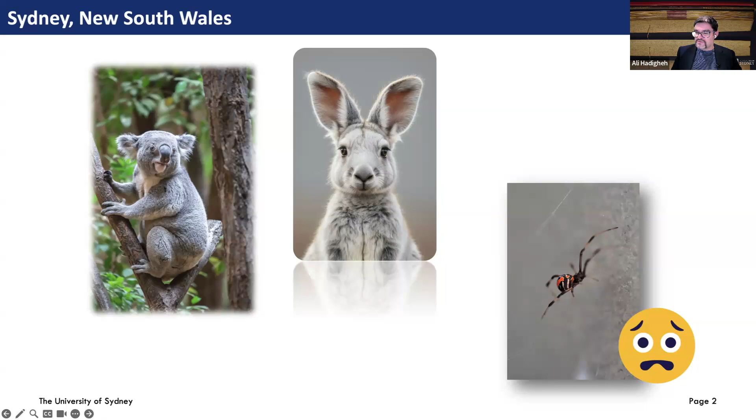I'll just start with some basics about where we're coming from. Probably some of you know Sydney, that's part of Australia, in the state of New South Wales. We're in the eastern part of Australia, and you might be familiar with structures like the Sydney Opera House and Harbour Bridge. We have very cute animals, kangaroos, koalas, friendly faces, but also some very scary ones, the deadliest spiders in the world. So different types of animals and friends we have here.

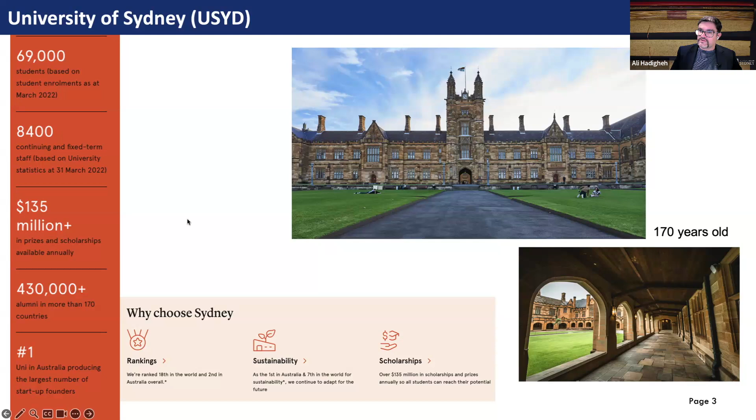In terms of introduction to our university, University of Sydney is the first university in Australia, established around 1850, so roughly 150 to 170 years old. We have diverse international students, and we offer different PhD degrees, undergraduate degrees, and so on.

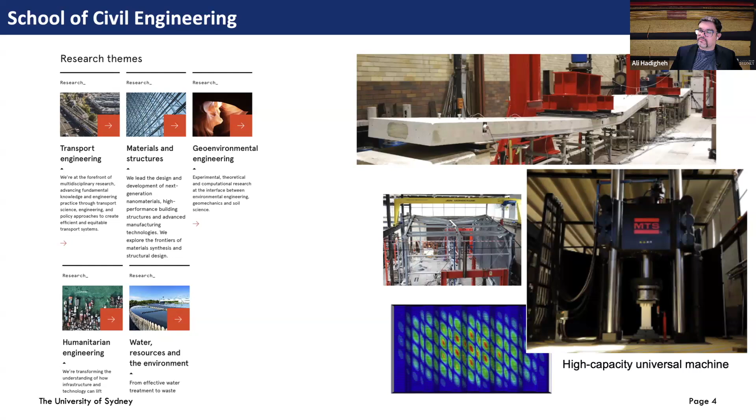The School of Civil Engineering is one of the oldest schools in University of Sydney, and we have different research teams and groups focusing on materials, transport, structural engineering, humanitarian work, water, and so on. Similar to other universities, we have state-of-the-art facilities for material testing, characterization, and structural testing.

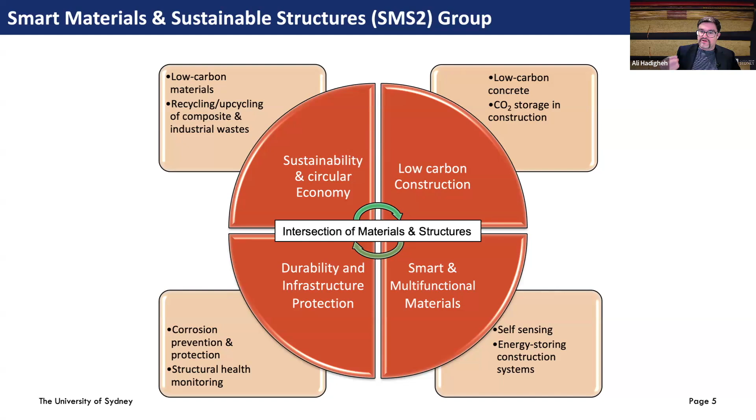To give you a better understanding of my research area, it's basically at the intersection of materials and structures. I focus a lot on the material side, but the application is in structural applications. Majority of my research relates to sustainability and circular economy, specifically composite waste, low carbon concrete, low carbon construction, and cementitious materials, looking at self-sensing in cementitious materials, and structural health monitoring using those self-sensing techniques, and how we can prevent corrosion and improve the durability of structures. Most of this focus area is basically carbon fiber and carbonaceous materials.

All of this has been achievable through the dedication of my research students, PhD students, postdocs, and so on, and also contributions from our industry partners from different areas, departments, and companies.

But to get into the topic of today, I mainly want to focus on the closed loop life cycle of FRP composites. I think everyone here is familiar with what FRP is, fiber reinforced polymer composites, and most likely everyone knows the advantages and benefits of these FRP composites. They are lightweight, with superior mechanical properties and durability properties, and at the same time lightweight, so they are perfect for lots of high-end applications.

This leads to, when we're talking about high quality, high mechanical properties, but at the same time high durability and lower weight, it's very fascinating and interesting to industry to use it, specifically for high-end products and reducing CO2 emissions from their components, for example in the car industry or aerospace. So we are always looking for smaller, lighter materials.

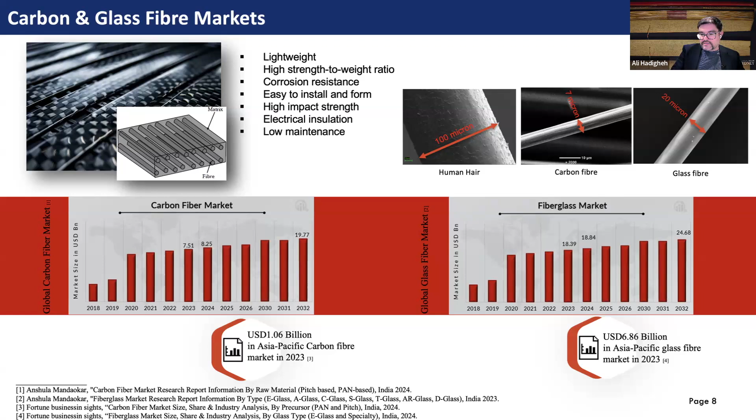The growth of these fibers—in this research and this webinar I mainly focus on two major fibers, carbon fibers and glass fibers—we see the trend always going up, increasing. Lots of industries are adopting these materials, from traditional industries to new industries, like for example hydrogen tanks and so on.

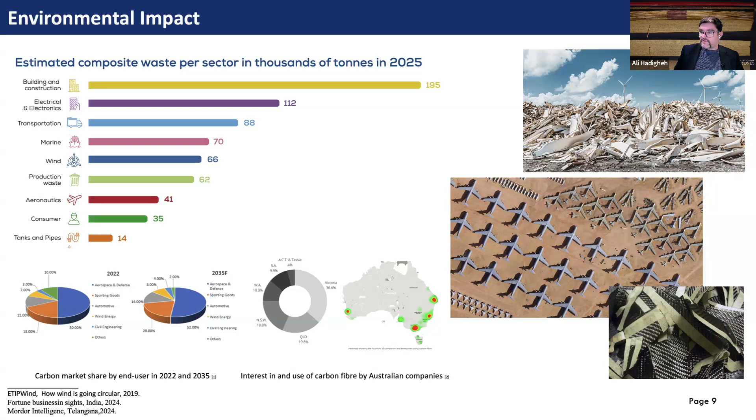The high usage of these composites leads to high wastage. The wastage we see is not just end-of-life components, it's also the waste materials we see during manufacturing. Traditionally, around 30% of those fibers and composites are wasted during manufacturing of the product, which is a huge amount. And when we look at the energy consumption for production of, for example, carbon fiber, and multiply it by the amount of waste, you see how much energy we're using but throwing away.

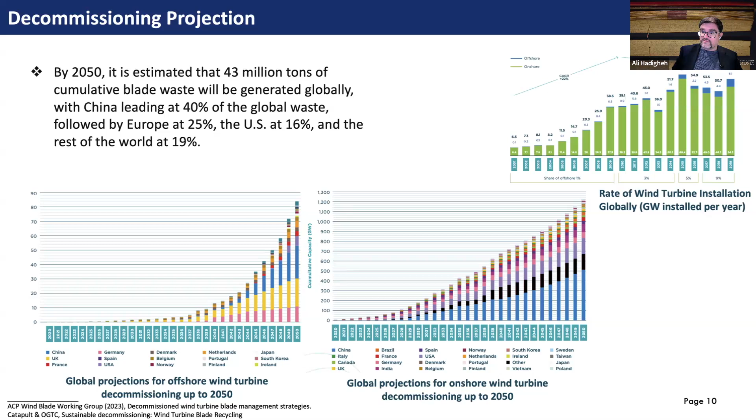So looking at one major sector, for example renewable energy, which is one of the largest users of FRP composites—I love the turbine blade behind Jose, there was a turbine very nicely made. We see the trend toward using and changing attitudes toward renewable energy in different parts of the globe has led to increased usage and production of turbine blades and their installation. We see this trend continuing up to 2050.

That leads to waste material at the end. So if you look at, for example, a turbine blade, and cut it into different sections, one of the main components is the foundation.

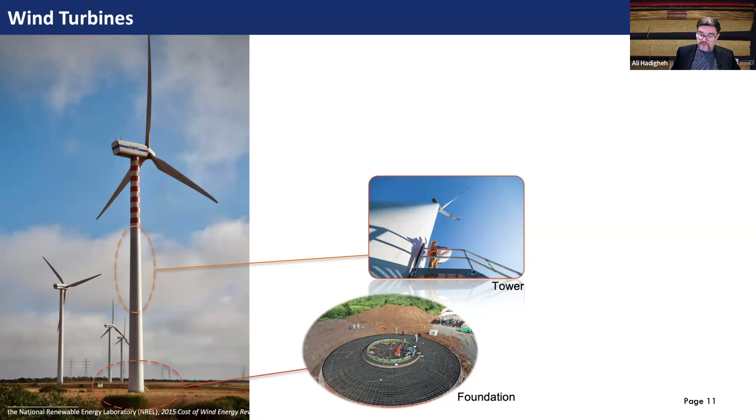Reinforced concrete, nothing extraordinary, we are all familiar with that. We know how to recycle them, we know how to reuse them. The other part is the shaft, the tower, which is mostly made of steel, some aluminum and other materials, and most of them are recyclable. So if we look at these components, there is no issue.

But if you look at that major component, which is the blade, you see that blade is made of different types of materials. One of them is fiber, is composite. So you have a combination of different polymeric materials, steel, balsa wood, aluminum and so on, to produce a blade in a turbine.

If we look at those turbine blades, the size dictates what sort of materials we have to use. Is it carbon? Is it glass? Is it a combination of them? Is it a hybrid system or not? So 40 to 50% of this blade is made of that composite.

And recycling of this is extremely difficult, and we know why, most of us know why that is difficult. When you cure the composite, separating that fiber from the epoxy is extremely difficult and energy intensive. So what can we do for that? How can we resolve this issue?

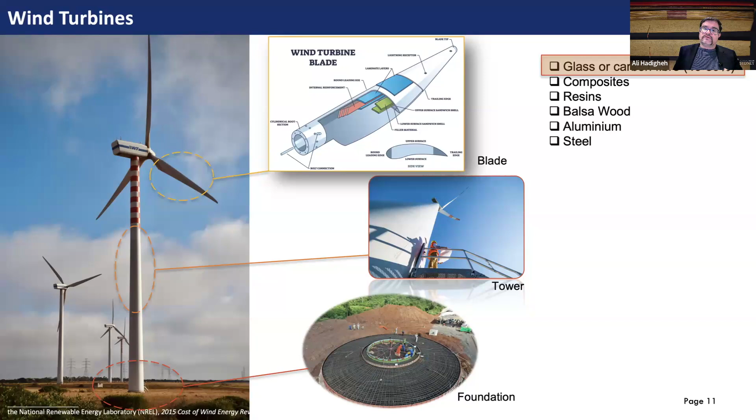First of all, if you look at the waste treatment hierarchy, we see that the top performing treatment methods are first prevention, preventing a structure from failing and keep reusing the material or a structure in the current system, and then repurposing that. These are the greenest ways of dealing with structures and materials.

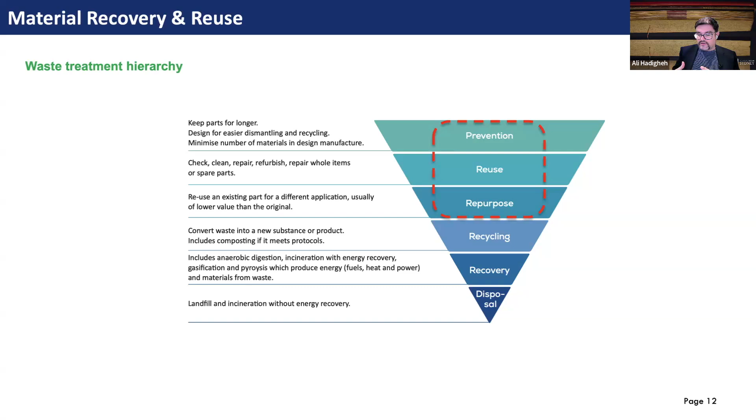And then when we don't have other options, then we look at recycling. So recycling is not the first option. That's what I'm trying to emphasize in most of my talks. My research and my work is related to recycling, but as I mentioned, it shouldn't be the first priority.

You might be familiar with these techniques, existing recycling pathways. We have techniques like co-processing, mechanical grinding, pyrolysis, solvolysis, electrical recycling, gasification, and other techniques.

And most of the top ones, if we look at, for example, pyrolysis, the technology readiness level is quite high, so they are already applied within industry, and we see recycled materials coming from pyrolysis plants. Mechanical recycling is also very advanced - basically grinding them and recycling and repurposing them. And co-processing during the cement kiln within the cement kiln reactor, and other techniques like solvolysis, which is a kind of chemical recycling method.

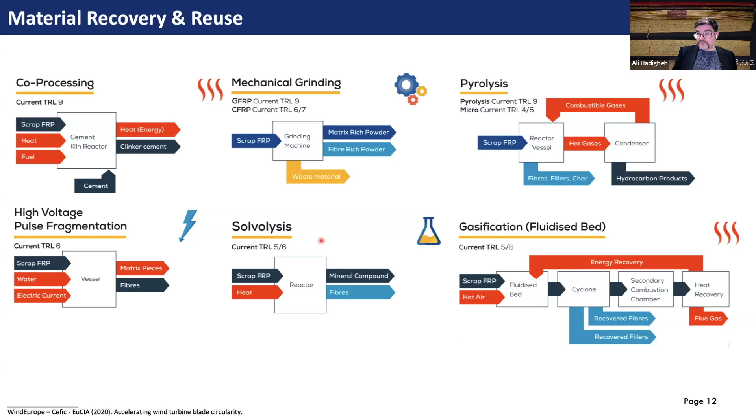But if we look at all these recycling methods, the biggest challenge is that when we have virgin composites, you're basically dealing with very well aligned fibers, nicely continuous and in perfect condition. But when we do recycling, you deal with a different scenario - you have short fibers, randomly distributed or mostly entangled fibers. So how do you deal with that?

And if we look at the performance of these aligned fibers versus randomly distributed short fibers, you see the performance of those randomly distributed ones is very minimal compared to virgin aligned fibers. So there are a lot of challenges in this space.

One of them is that alignment, the short nature of these recycled fibers. The other issue we might see within industry and in practical application is transportation. For example, when you deal with recycling of turbine blades, they are 20-meter, 50-meter, 100-meter blades. So how do we transport these? So logistics, WHS, how we can cut them, crush them safely to make sure harmful materials don't get into our lungs, and so on.

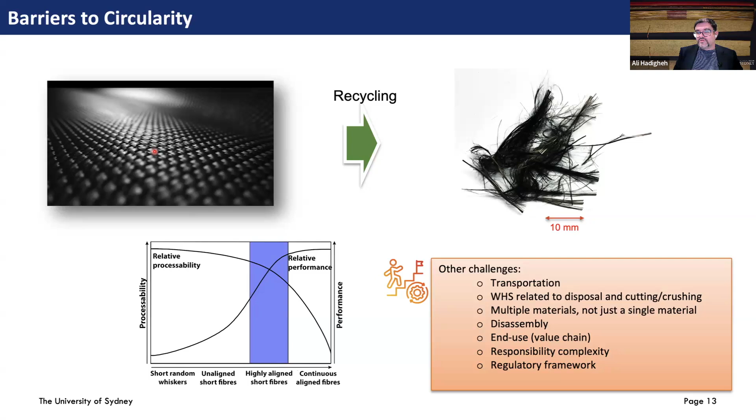Or if you want to repurpose those turbine blades to use in other types of structures, who will certify those? So all of these challenges exist, but they create multidisciplinary opportunities for us to do research, which I see a lot of people here doing - very fascinating, very interesting work in this space.

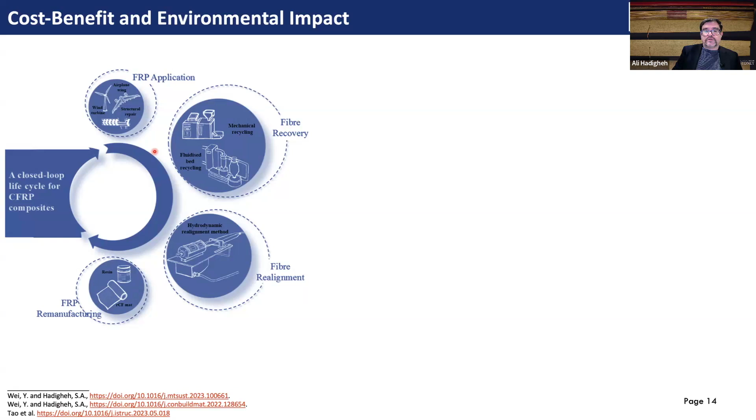I now look at some of the works that we did in the past. We basically started this type of research in 2019. We knew there were existing methods, and we wanted to see which one would be suitable and how we could proceed, and which one we had to select.

So we started with cost benefit and life cycle analysis, which helped us select methods suitable for the type of waste we were dealing with. We looked at both CFRP and GFRP, carbon FRP and glass FRP, because the scenario is different - the recycling method would be different for carbon and glass composite. Glass composite, GFRP, is quite cheap, so you can't use energy intensive or very expensive methods for recycling glass fiber from GFRP.

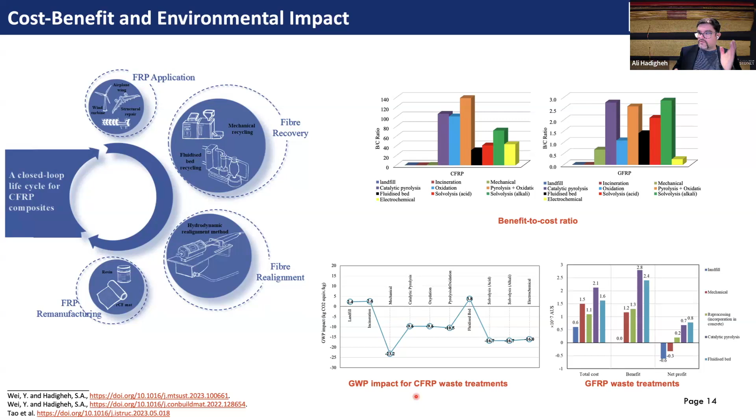But for CFRP, it makes sense because it's a strategic material, it's expensive, and production of virgin carbon fiber is very energy intensive. So it makes sense to use pyrolysis or solvolysis for extracting carbon fiber from FRP. We looked at cost to benefit ratio, and global warming potential of different methods, including landfill, incineration, mechanical, catalytic pyrolysis, solvolysis, and so on. Amongst these, for our FRP composites, we started with pyrolysis and oxidation method.

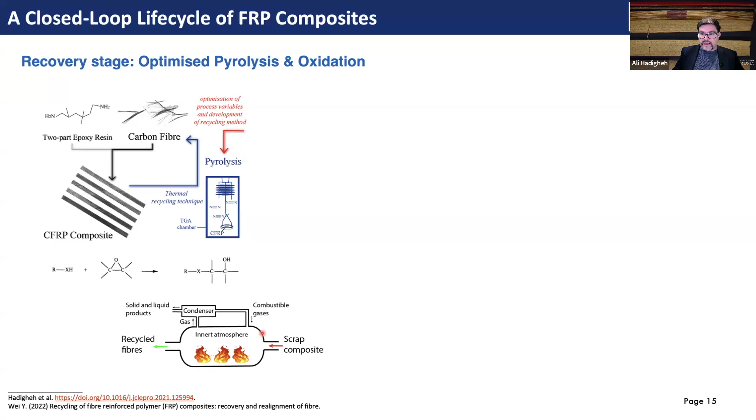If you're not familiar with those methods, pyrolysis is basically pyrolyzing or burning your samples within an inert atmosphere - in this case nitrogen - and then extracting fiber and separating it from epoxy within that system, then reusing those epoxies as combustible gases or byproducts.

After the process, with these CFRP composites, after recycling we could get clean carbon fiber from the composites of very good, high quality - around 80% tensile strength retention and 88% tensile modulus retention, which is quite reasonable, with minimum energy usage. But the challenge was that if you look in more detail, you see some discontinuity on the surface of the carbon fiber.

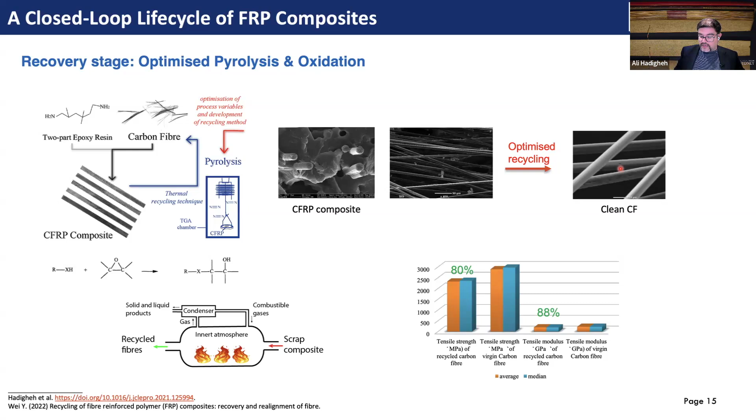This discontinuity relates mainly to the temperature we use. We tried to optimize that, but after a certain temperature, carbon fiber gets damaged. So we took that further. We worked with two different industries - one active in aerospace producing airplane components, and another active in maintaining high-end sports cars and carbon bikes.

So we got materials from them, and we were one of the first teams to look at hybridizing the system - solvolysis process and pyrolysis process. Basically, we use solvolysis as a pre-treatment method for separating fiber from epoxy, and then go through the pyrolysis.

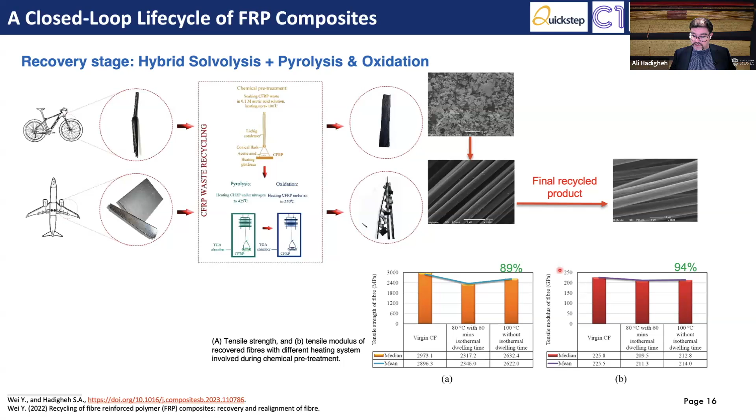What it does is basically reduce the energy demand, reduce the amount of heat we have to expose our fibers to. By that process, we could get very good, high quality carbon fiber at the end, shown in the tensile test we did in terms of tensile strength and tensile modulus, which was around 94% tensile modulus retention. So it was very good performance.

But now, more recently, we are looking at other options, which I think we're the only research group focusing on - microbial hydrolysis. This is effectively applied to cheap materials like GFRP composites. It's very suitable for that.

Basically, we work with four different fungi and do the microbial hydrolysis process - we culture those spores and fungi and expose the composite to them, and they basically try to use the epoxy as feedstock, then we extract the fiber. We're looking at how we can improve the enzymatic performance and activities within those spore solutions.

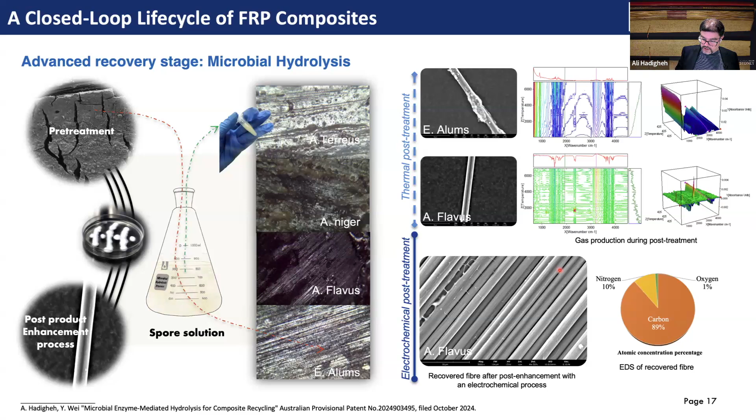So this is ongoing research. We have a patent for that, and we're hoping to get it into publication very soon. But still this issue exists - we're still dealing with randomly distributed, short fibers. How do we do that?

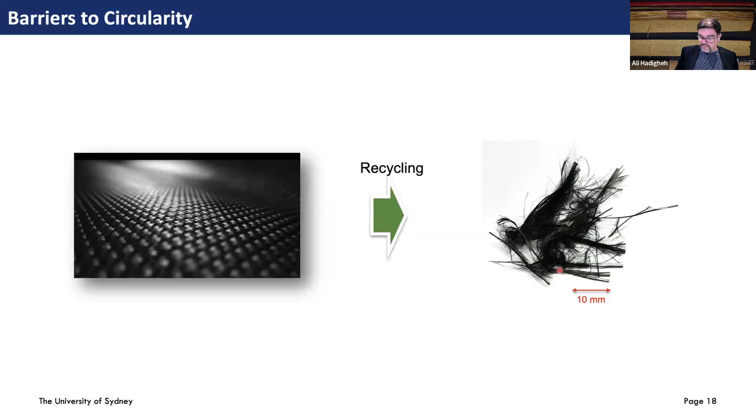We also looked at that with one of my PhD students - a previous PhD student - who looked at different methods you might know for aligning the fibers. She looked at the systematic analysis of these realignment methods and how effective they are and how they can help us.

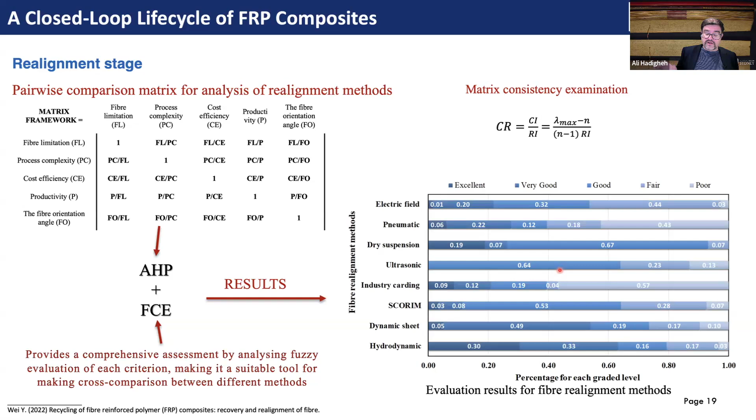We then came up with our own technique to basically align these randomly distributed fibers into the direction we desire. So we developed the hydrodynamic alignment method, the HFAM method, and we could get up to around 80%, 75% fiber alignment with our technique.

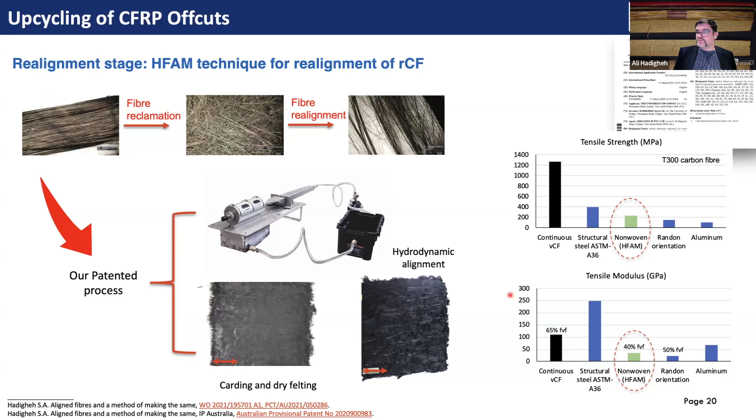We have a patent, a PCT patent on this technique, and we are working on applying these into different structures and different research areas.

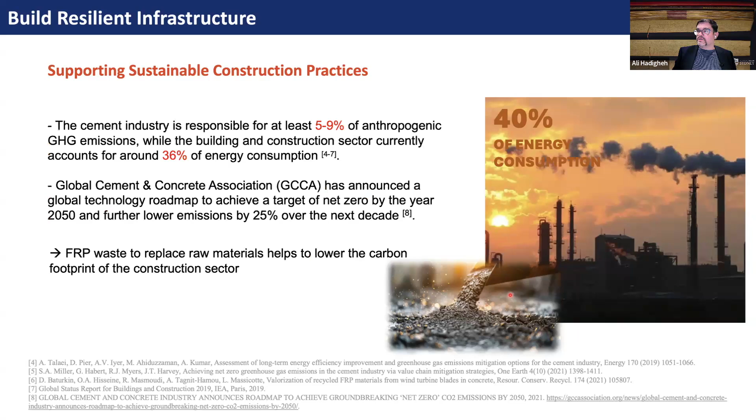The rest of my talk is mainly looking at cementitious materials. We know that the built environment contributes hugely to CO2 emissions, and within that, cement production is responsible for roughly 5 to 9% of CO2 emissions globally. So it's very important to address that, and there's been a lot of research in this space.

We also started with a literature review on existing methods specifically for glass fiber and GFRP composite in cementitious composite, and compared how these different methods - mechanical, catalytic pyrolysis, fluidized bed, and so on - perform. Mechanical recycling was one of the top performing in terms of cost benefit, total investment, and global warming potential.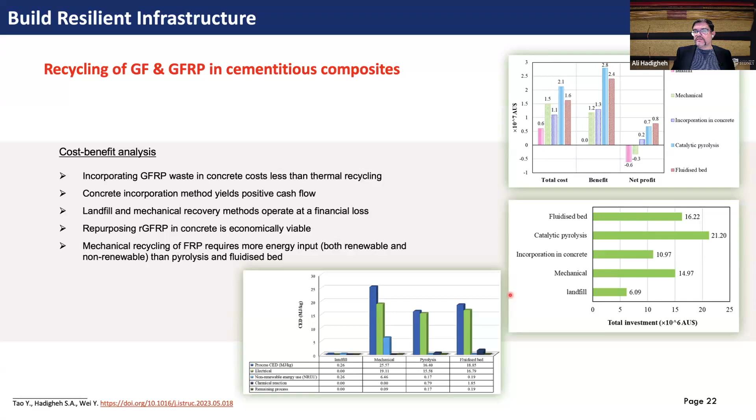So we focused on this with one of my PhD students - she is graduating very soon. We started working on three aspects of it.

We started off with looking at how these FRP waste, when incorporated into cementitious material, perform - what would be the durability, performance of mechanical properties, and so on. But at the same time, we have issues related to fiber dispersion, so how we can improve that performance.

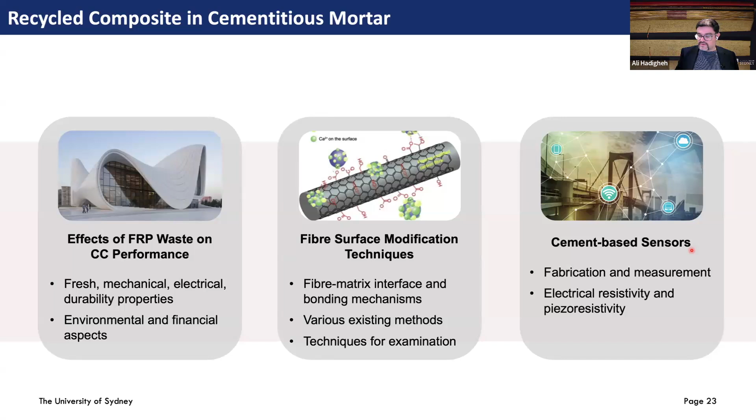When we're talking about carbon fiber and cementitious composites, this is very tempting because they are conductive materials - they have sensing properties and electrical properties. So self-sensing and using them as a sensor in concrete is also tempting. That's why we looked at these three major aspects.

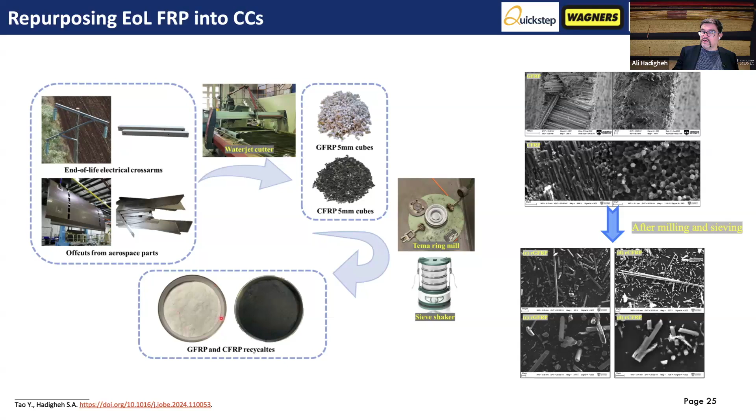To start, we worked with two different companies - one active in the aerospace industry producing airplane components, and another in construction producing cross arms out of GFRP. What we did was downsize these GFRP and CFRP components, pulverize them, convert them to powders, and then replace cement based on this recycled CFRP and GFRP material.

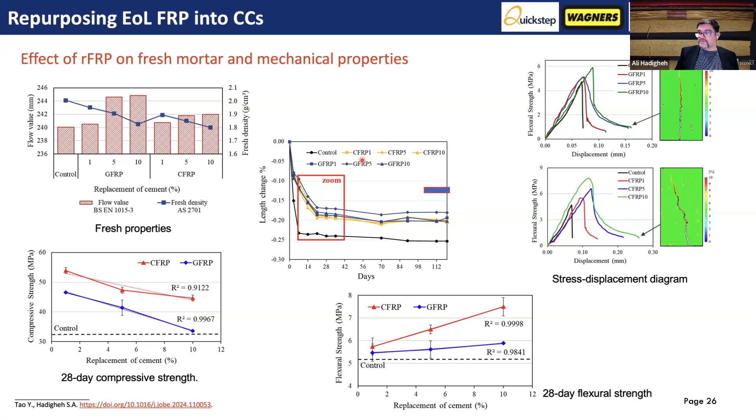A lot of people have done this kind of research, and consistently the properties of these materials were better than the control without any waste materials - in terms of mechanical flow table properties, compressive strength, and shrinkage, which dramatically reduces because of the fibers inside the composite. Tensile strength obviously increases because of the fiber, as does flexural strength.

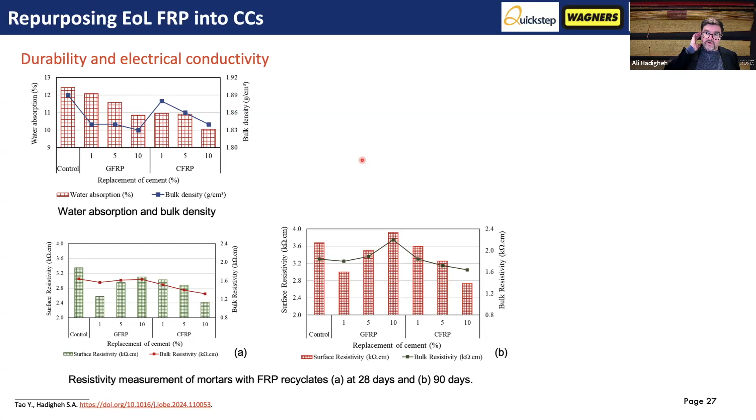The same thing happens to resistivity - when you use CFRP, you basically increase conductivity. Carbon fiber is a very good conductive material. Water absorption also reduces, due to reduction in voids inside the concrete. So you see a lot of properties improve by using these recycled materials, with minimum energy, simply by replacing cement within the concrete.

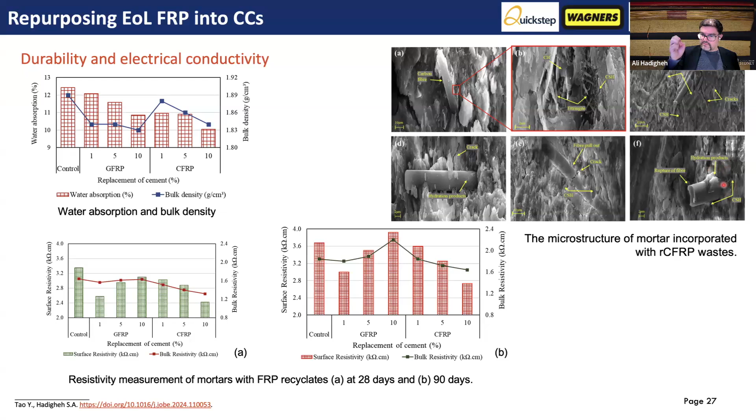If we look at the CSH and hydration products around these fibers inside concrete, you see that they basically form around fibers and create a good bonding.

The other work we did was focusing on those offcuts that we mentioned - 30% are wasted during the manufacturing process, a lot of fiber offcuts are wasted during the process. So how do we deal with this?

Basically, it's addition of fiber into concrete. But when we do that, we have to be very careful, because addition of fiber is good - it improves tensile strength, flexural strength, and possibly reduces shrinkage - but at the same time, it leads to formation of voids and increases the void content and permeability of the concrete.

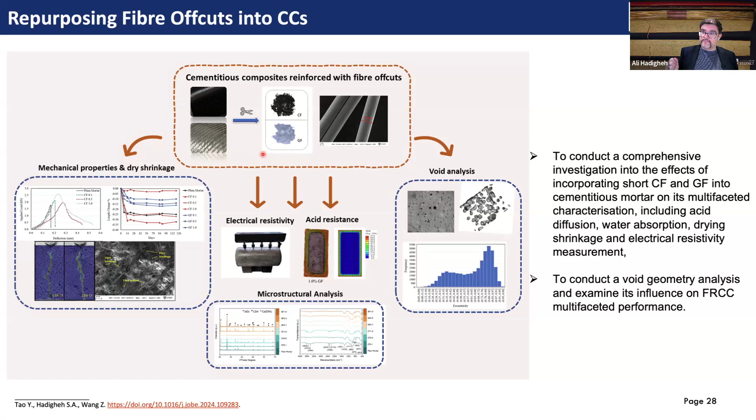That's why we looked at how we can characterize that - we used micro-CT to analyze voids and also carbon fiber inside the cementitious material. And interestingly, we realized that...

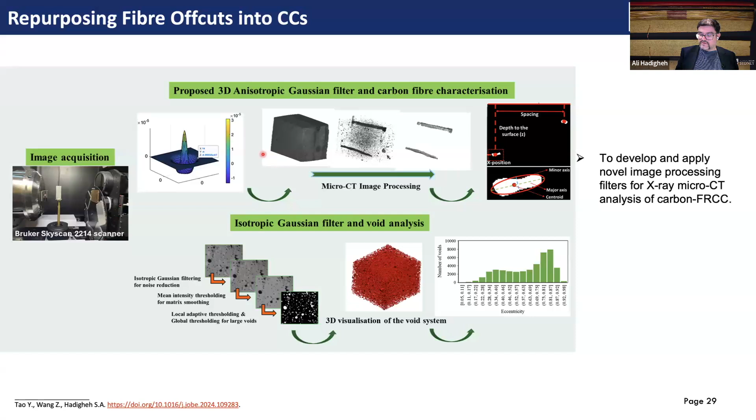By addition of carbon fiber, you see a specific shape of void forms inside the cementitious material, and those elongated voids lead to higher permeability and lower mechanical properties. So it's quite interesting to see that relationship between the shape of void and the carbon fiber and dosages of carbon fiber inside the cementitious material.

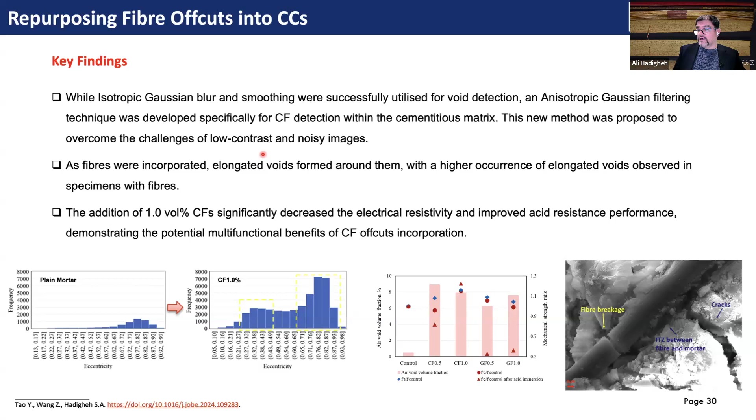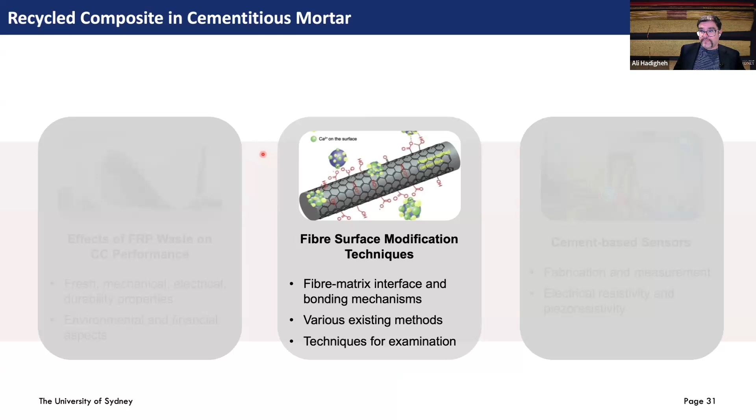But the second part of our work, as I said, that dispersion is extremely important and critical. So how can we improve that dispersion? Why is dispersion important? Why is surface modification important?

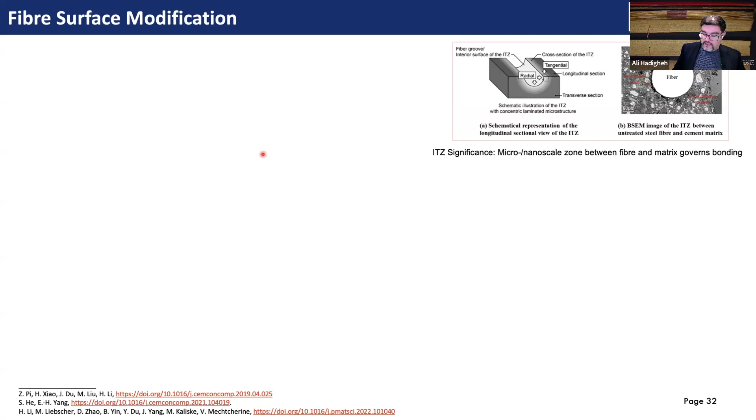Because basically the interaction between fiber and cementitious material is through that interfacial transition zone. And if the transfer of load is happening through that ITZ, if we have a very strong, robust ITZ, you get very good performance from your cementitious material.

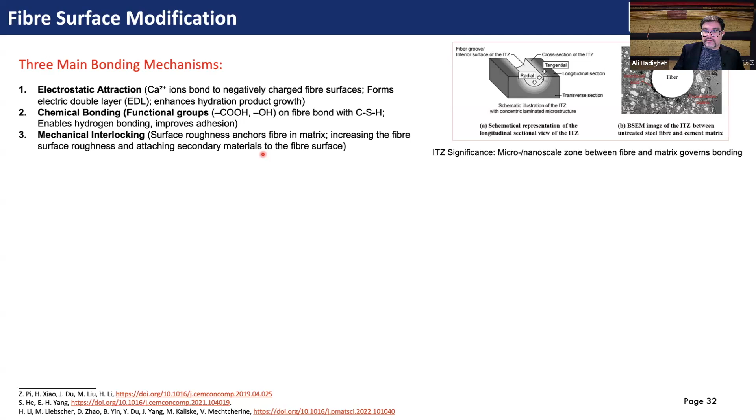So how can we improve that? There are different techniques: electrostatic attraction and ion bonding, or chemical bonding, which is very strong bonding through functional groups and CSH gel in cementitious material, or it could be mechanical interlocking, or a combination of these.

So based on that, there are different methods. They have advantages and disadvantages, obviously, but selection of the appropriate method is a fine balance. You have to look at performance, cost, environmental impact, and sustainability of those methods, and so on.

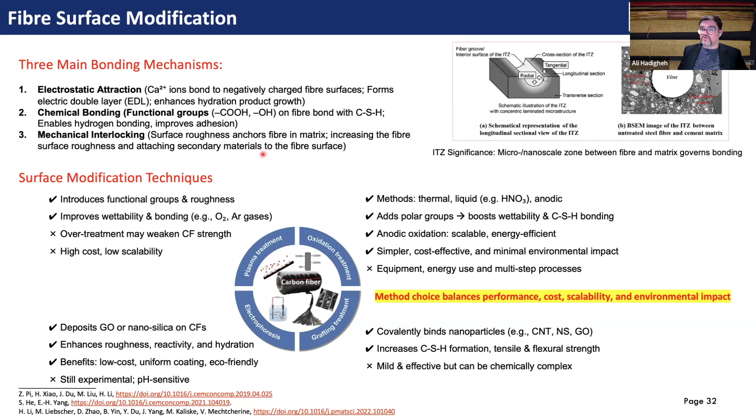So with my PhD student, we looked at bio-based carbon fiber surface modification. And why did we select that? Because usually the construction industry is a conservative industry and doesn't want to deal with very harsh chemicals and materials.

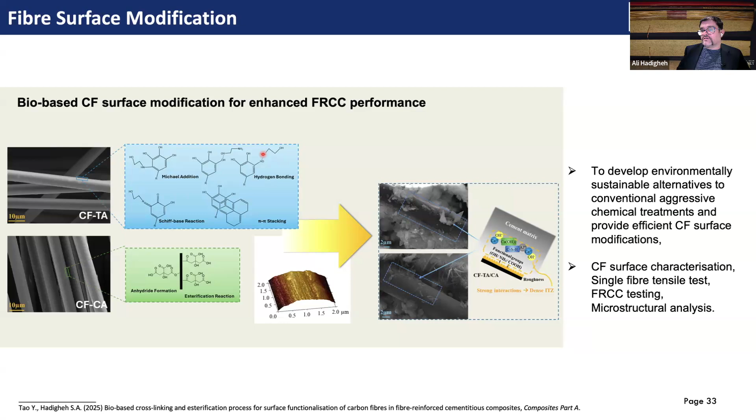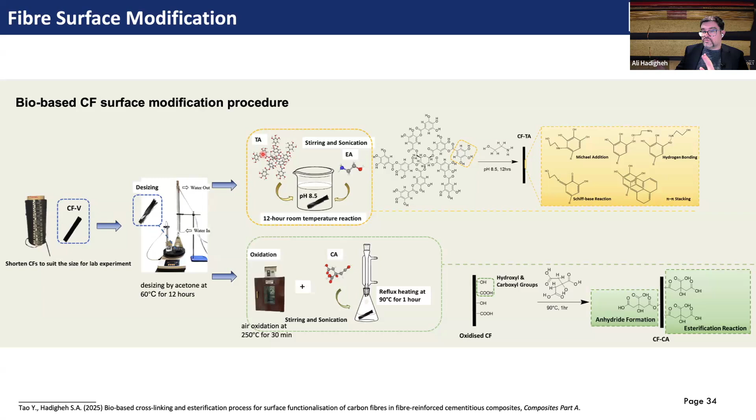So these bio-based materials, tannic acid and citric acid, very weak acids, we used them to functionalize the surface of our carbon fiber and improve the performance. We basically desized our carbon fiber first, then exposed them to tannic acid oxidation and citric acid, and then functionalized the surface with hydroxyl groups, and tried to incorporate them into cementitious material.

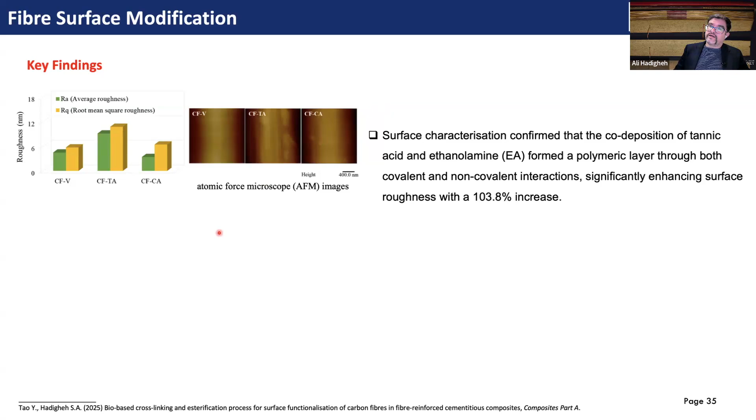And when we look at AFM images, we see the surface topology of these carbon fibers and their roughness. You see that we are improving the roughness of the surface. We're also incorporating functional groups on the surface, which increases the bonding between fiber and the cementitious material and improves the ITZ performance.

So that's basically very successful, and I think it's quite scalable within the industry, a very simple process that can be achieved with normal facilities that we might have.

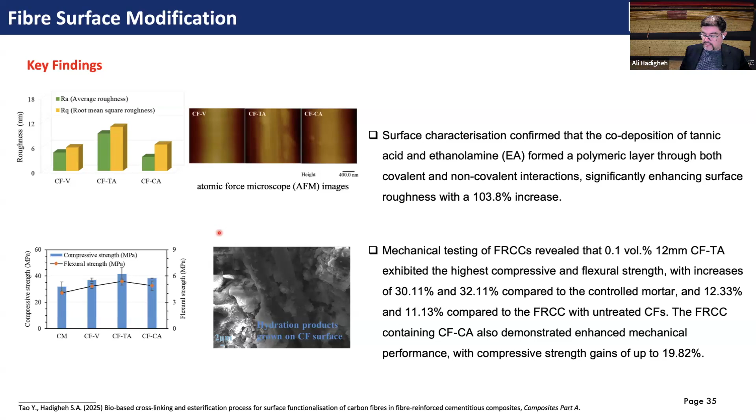But if we want more high-end composites and surface modification, for example in situ surface modification during the production of carbon fiber, obviously electrochemical grafting is one of the good options.

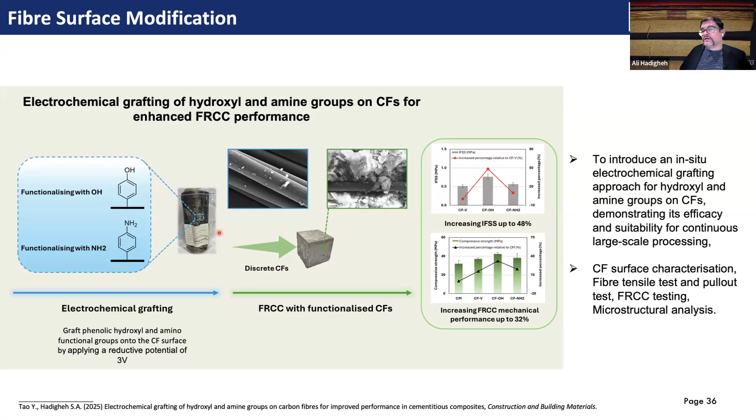And we again worked on hydroxyl and amine groups to functionalize those on the surface of carbon fiber and then see how that performs.

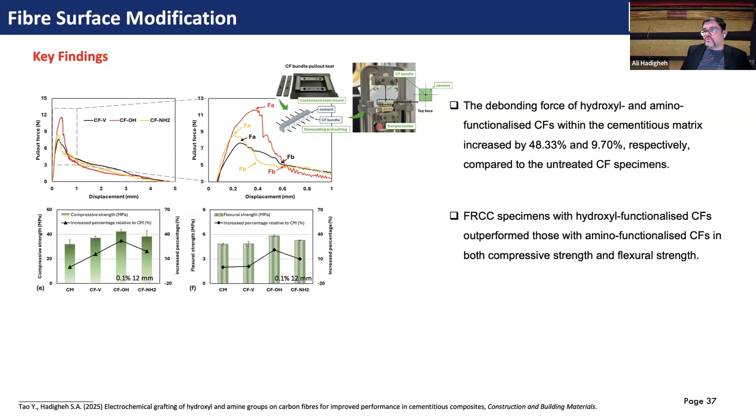We looked at the interfacial response when we pull the fiber from the surface, as you can see from the concrete, and identify the interface and pull-out force and so on. It was quite successful, and we saw that mostly hydroxyl groups performed better than amino-functionalized carbon fiber.

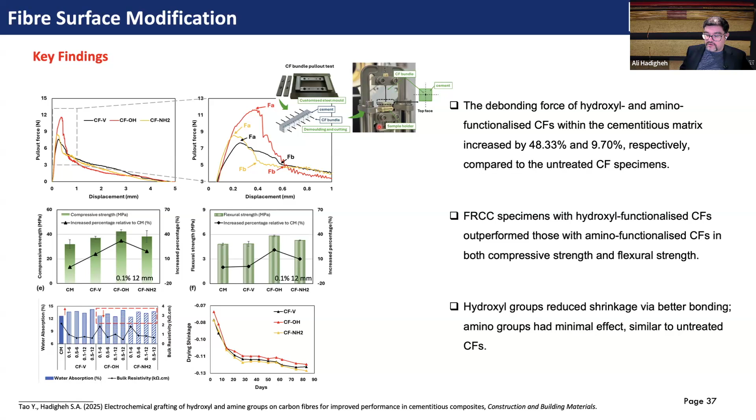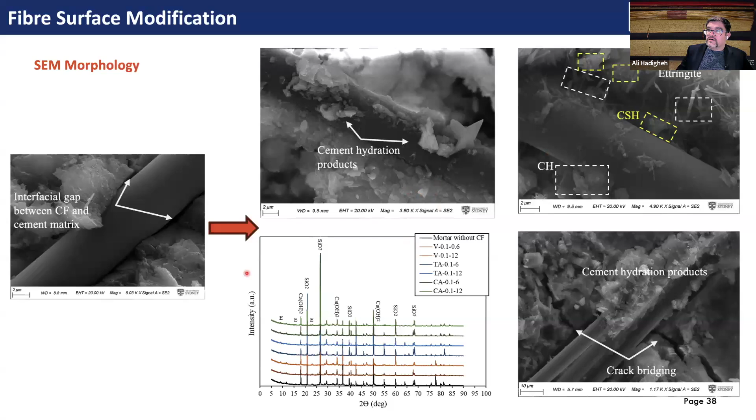And that was probably because of the hydration products and interaction between hydration products and these functional groups on the fiber surface. You can see this is simple, virgin carbon fiber without functionalization, but these are the functionalized carbon fibers. You see the interaction of CSH and carbon fiber, how well these are basically bonded to the cementitious material.

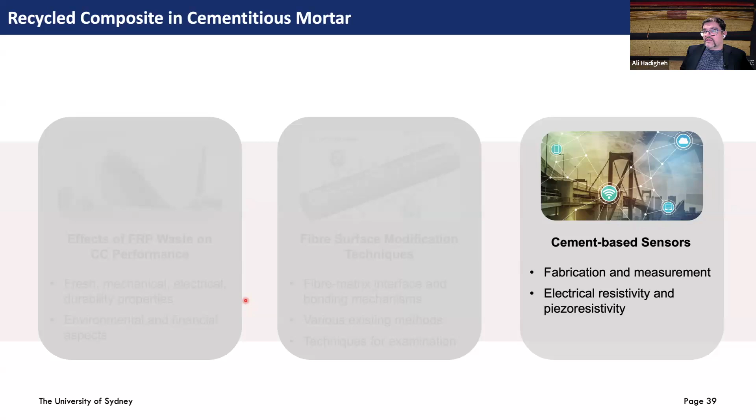But the final area that we looked at was basically using the electrochemical performance of these materials when we incorporate carbon fiber, for example, inside concrete. One of the things we always look at is mechanical properties or some of the durability properties of these concretes with waste materials.

But specifically for the case of carbon fiber and CFRP in concrete, we need to be very careful about corrosion, because usually to avoid corrosion you need high resistivity inside concrete. But when you add carbon fiber, carbon-based material, into your cementitious material, you're reducing the resistivity, so you're increasing the potential for corrosion to happen.

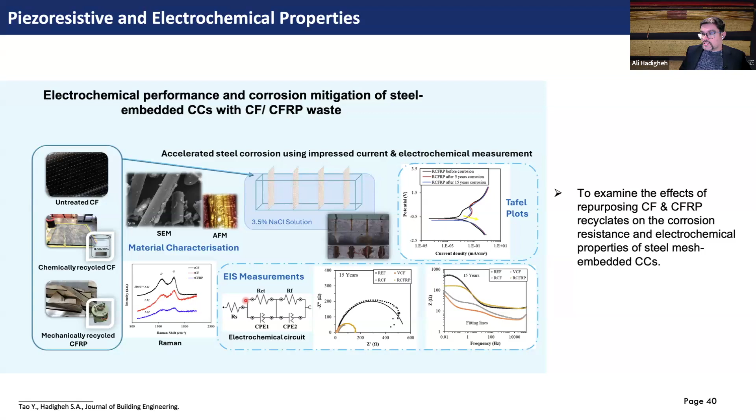So that's why we did this research. We looked at how we can measure the corrosion performance and how they perform. We looked at the corrosion potential of recycled carbon fiber; this is the reference without any fiber, pure cementitious material, compared to cementitious material with virgin carbon fiber, recycled carbon fiber, and recycled CFRP.

So out of all these, the one with recycled CFRP performed very well and had the lowest corrosion among all of them, very comparable to the reference.

And the reason was that it's true we are adding a steel-like carbon fiber, but the epoxy part of the CFRP helped improve resistivity as well as filling the gaps within the voids, which improved the durability properties and reduced water ingress inside our concrete.

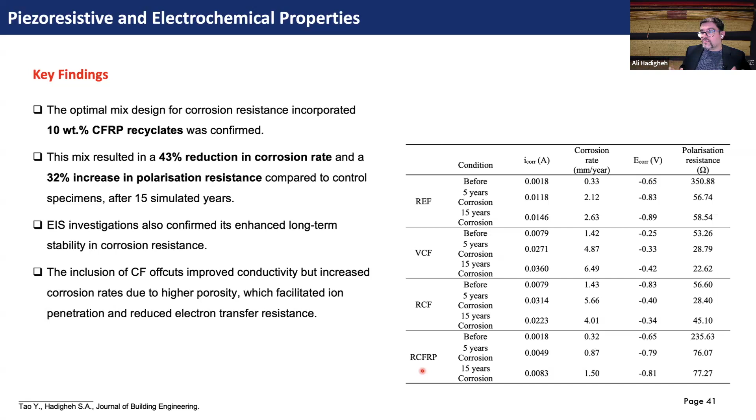So these are the things we need to consider when dealing with incorporation of these materials in concrete. But in terms of self-sensing, we did piezoresistivity tests and looked at when we incorporate these composites into concrete, both CFRP and carbon fiber, and also GFRP, to see how they perform and if we can use how they respond.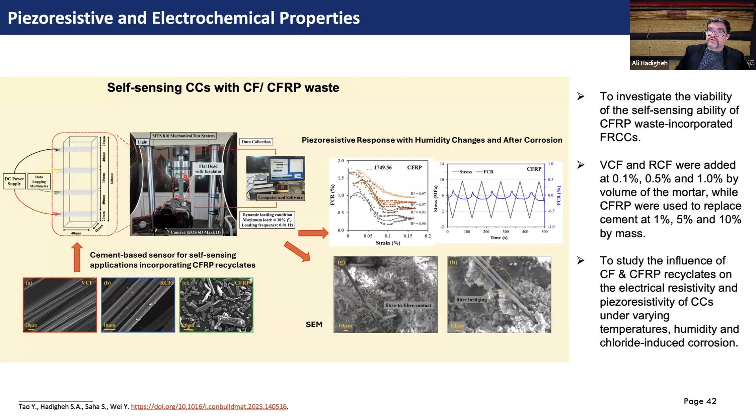We did dynamic testing, incorporated these materials into samples and tested them, and found that the response of samples with carbon fiber and recycled carbon fiber wasn't really stable. So it wasn't very good for self-sensing.

Piezoresistivity wasn't stable, but those with CFRP had a better performance, a continuous and stable performance that we can manipulate to get self-sensing out of them. This is probably due to agglomeration or alignment of fiber inside concrete. But with CFRP powder inside concrete, the dispersion is better - you have denser samples, so better networking of electrons and conductive materials inside your cementitious material.

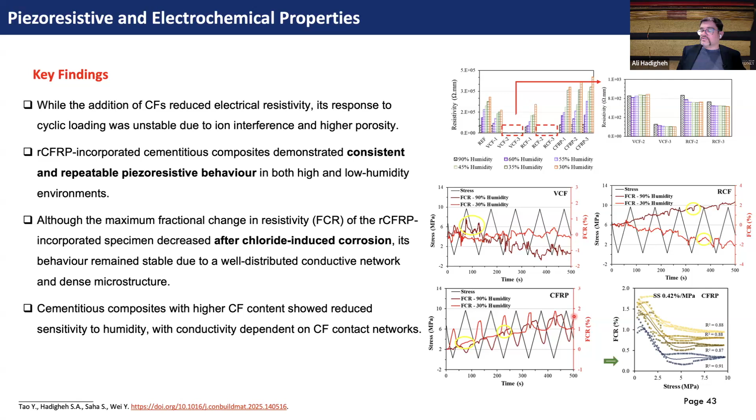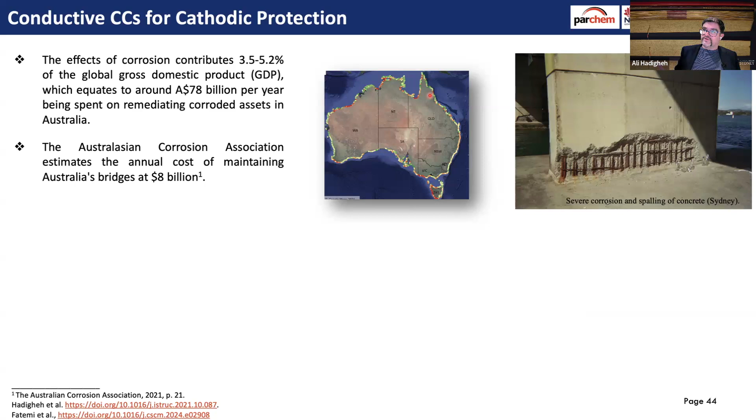I don't know how much time I have, but just a couple of case studies related to these waste materials. We teamed up with transport authorities and road authorities in New South Wales. Australia has a long shoreline, and with exposure to marine environment we have corrosion - that's inevitable. One technique very common for mitigating corrosion and infrastructure failure is cathodic protection, or impressed current cathodic protection.

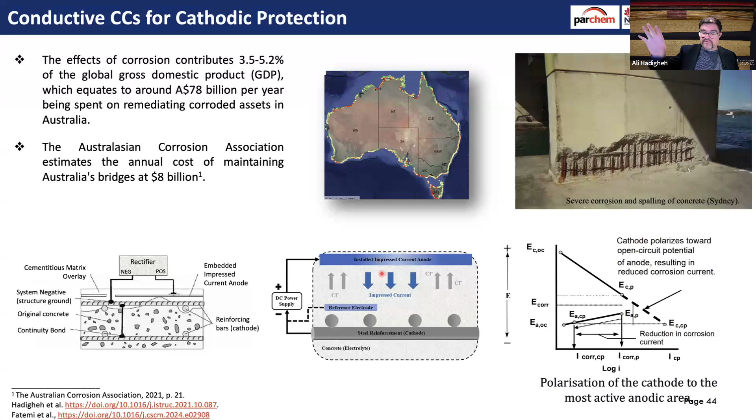The challenge our industry partner had was they applied this ICCP system onto their bridges. The system works by embedding an impressed current anode into the surface within the concrete near reinforcement. What it does is take chloride ions away from steel reinforcement and out of the system - instead of chloride ions exchanging with reinforcement, they try to avoid that by impressing the system within that environment. But the challenge they had was acidification of the mortar on those anodes.

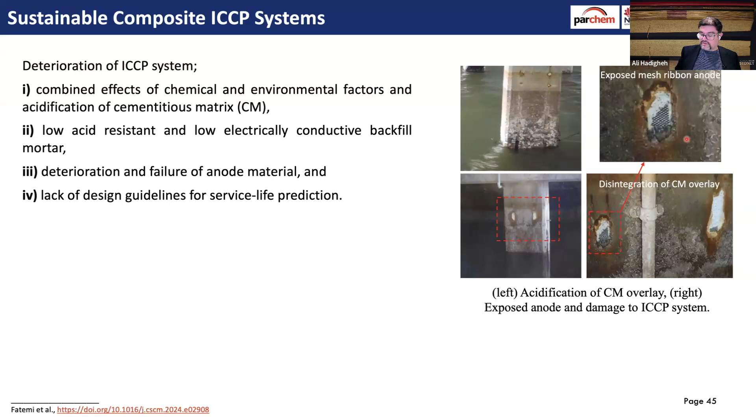You can see this mesh anode under the mortar, but after a while it's acidified, then washed away and the whole system failed. They spent millions of dollars on one bridge to install these, but after a couple of years they washed away and failed. So they asked us how we can improve these - one aspect was improving acid resistance of this mortar material.

We looked at geopolymer concrete, and we are still working on and improving that.

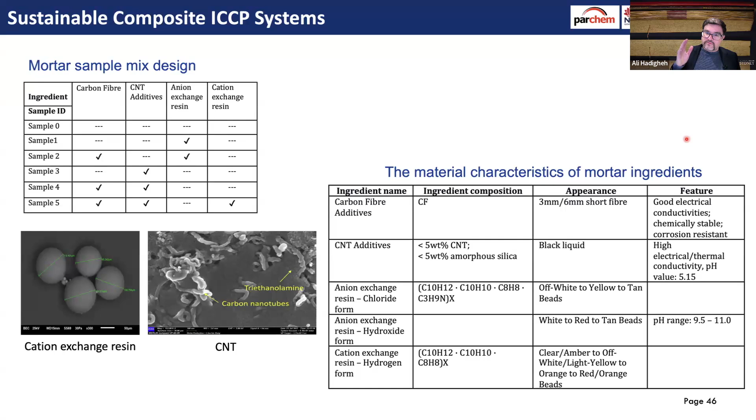Thank you. So conductivity is extremely important in this case, because you are dealing with ionic conductivity between the environment and electronic conductivity. So now we are using recycled carbon fiber within this mortar to improve the conductivity and install it onto a bridge for cathodic protection.

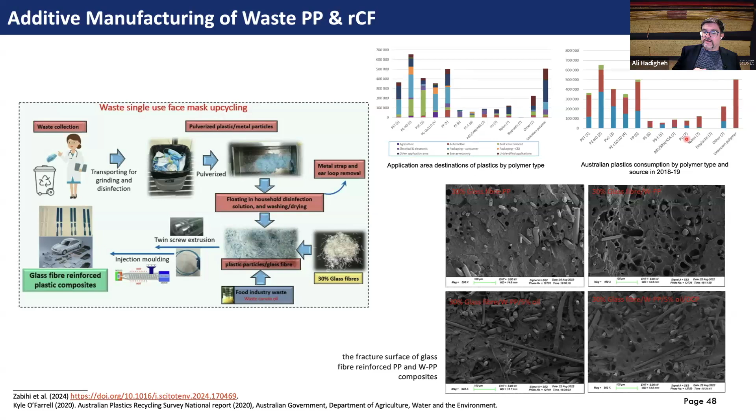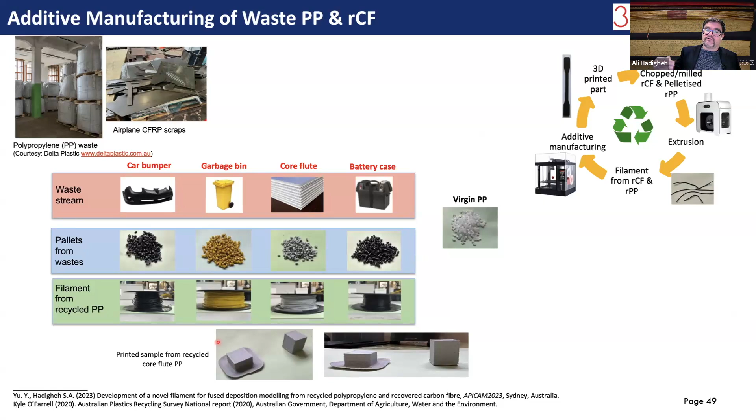The other type of application we've been doing within the group is incorporation of carbon fiber or glass fiber inside filaments for 3D printing. That's one of the other areas of research we're doing - using face masks or polypropylene from different waste materials, incorporating carbon fiber into it, making filaments, and then 3D printing different components and materials out of them. It's basically more toward upcycling of this CFRP waste.

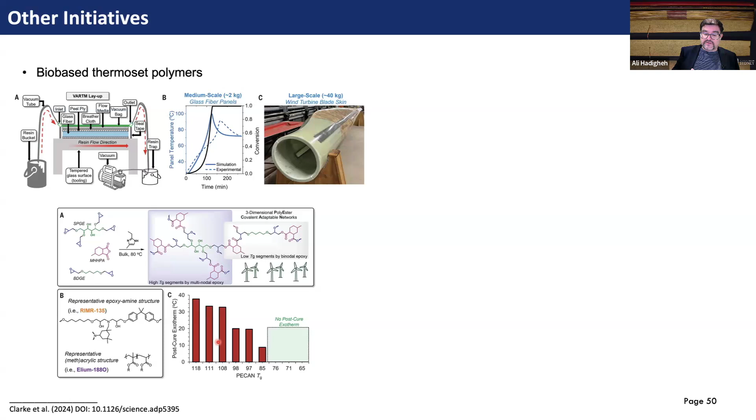There has been research on developing bio-based thermoset polymers, which is really nice, very interesting work, and that might even resolve a lot of issues related to dealing with waste materials or repurposing. So these are all techniques and methods that have been established and have worked.

Coming to the summary of my talk: prevention, reuse, and repurposing are the priorities. And then looking at those logistical issues - basically regulatory frameworks, and who deals with the waste, who deals with end of life products, and so on.

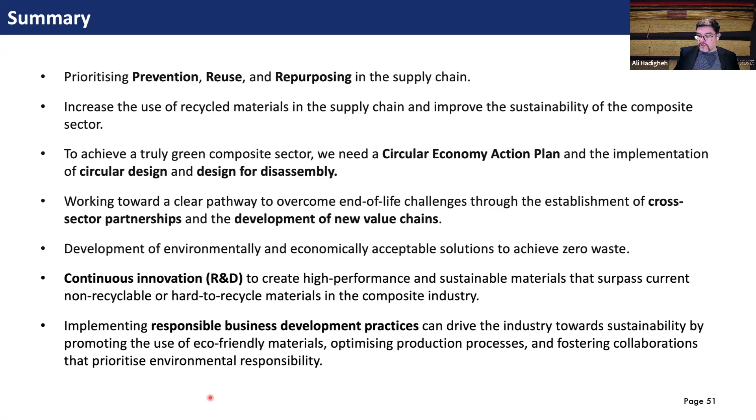This is a very interesting, exciting area, and I would love to hear your thoughts, and would be happy to answer any questions if there are any. I am always happy to collaborate with anyone - if any part of our research is of interest, please let me know, and I'm more than happy to work with any of you guys.